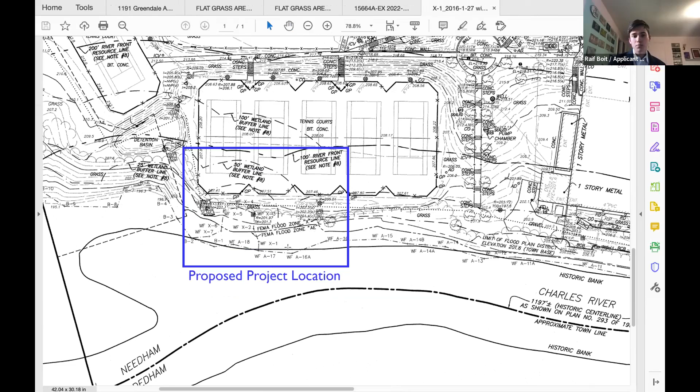The first is the installation of a canoe rack. This is not a dug-in fixture. Instead, it will simply lay on the grass in this area, as you can see on the mouse. The dimensions of the canoe rack are 10 feet long, 8 feet tall, and 8 feet wide. It is made of wood. There are no posts being dug for this canoe rack. Instead, an extremely minimal amount of leveling, displacing less than half a cubic foot of dirt, will occur before laying paving stones on that to keep the wood out of direct contact with the ground so it can last longer.

The second part of the project is in this area, the clearing of invasive species and debris to provide access to the river.

As you can see, this is a drawing of the existing conditions of this area. There has clearly been some sort of construction done in the past at this location, as evidenced by sheet wood that is there, as well as 2 embedded pillars seen here and here.

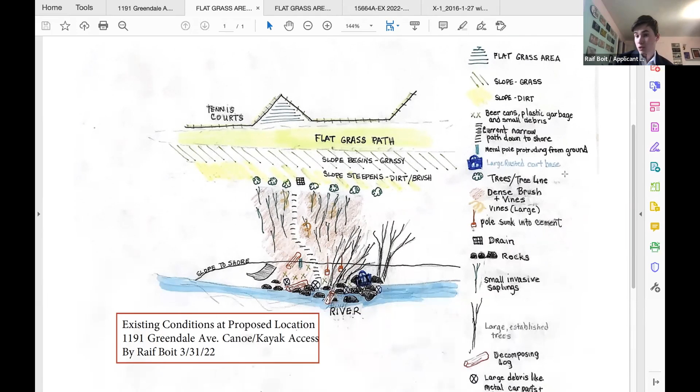One of those 2 pillars will be removed as it is already relatively loose. The second instead will be polished and repurposed to hold a sign. Then, as I said earlier, the canoe rack will go in this area, and there will be clearing of invasive species in this area.

Does everybody see this? Good. So this Asiatic bittersweet has been choking out plant life in the area. Among them, you can see this is actually hanging from that same vine.

So we plan to remove all of the vine in that area, as well as some Japanese knotweed in the area, which is bamboo. We will be trimming that back, which is mainly in here, as well as some brush. We will also be laying 2 paving stones here and here.

This is to level the area, as the current location where we plan to put those 2 paving stones is a tripping hazard and not level. So laying these paving stones will make the path that already exists much easier to traverse, as well as prevent further erosion.

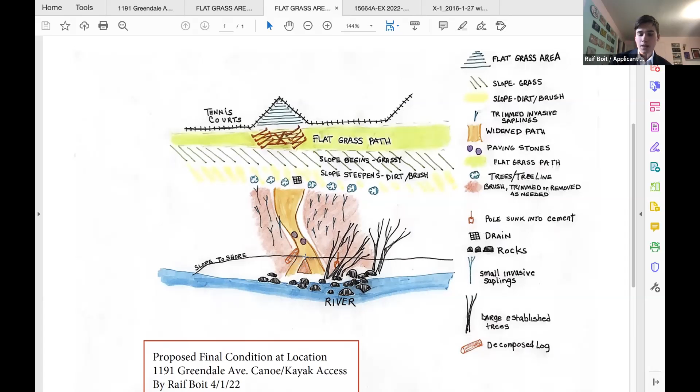Then there will also be some minor trimming of existing plant life in this area, simply to keep it out of the path and make it more easily accessible. As well, we'll be cleaning up dead wood and debris on the ground.

As well as large pieces of litter, such as this metal dolly that has been there for, at the very least, to my knowledge, months, most likely years. We'll be removing all of that, as well as all this debris you can see on the ground next to those pillars. We'll be removing most of that as it's already deadened, and we'll simply be clearing it out.

Beyond that, mainly we'll be taking out leaves and some beer cans that are already in that area. As you can see, there's one down here, as well as a couple of metal stakes that are existing, as you can see in this photo here, that was clearly put in for some previous project many years back, along with the metal pillars.

That is the gist of the project. I now stand open for any questions that members of the commission may have.

Nice. I will go to the commission members. Trying to decide what would be the best image to have on there. Maybe the first one that had the blue square?

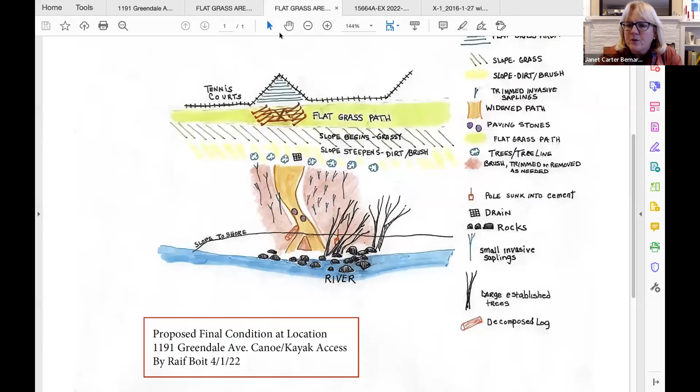Hey Janet, could I suggest, could I also ask, there was one that had all 6 pictures showing at the same time or something like that at one point? Would you rather be looking at that one, all 6 pictures? At some point, I don't know if it had every picture or just the photos. No, there was this- good. Now it doesn't have the one you were suggesting, though. It doesn't have that one. But anyway, that's okay, because I was just trying to decide what would be easiest for the commission to reference the various pieces.

Peter, do you have any comments or questions? Yeah, just a couple of questions. So it sounds like a couple of- why is it switch off?

Anyway, so it sounds like there's going to be no platform or anything like that built, just a couple of paving stones, clearing debris, a couple of paving stones to stabilize a little bit of the ground. That's what I heard. Is that true? Yes, the only thing that will be built is the canoe rack, in which the only digging will be for the paving stones.

Okay, and now, I figured I'd ask, is this open to the public at all, this access? It is primarily for the school, St. Sebastian's, to provide access for them. Okay.

And could you go back to a picture showing the ground going down to this area? Do you have a picture of the ground actually going down to this area? Just curious if there's anything at all you have for that. Do you have any picture?

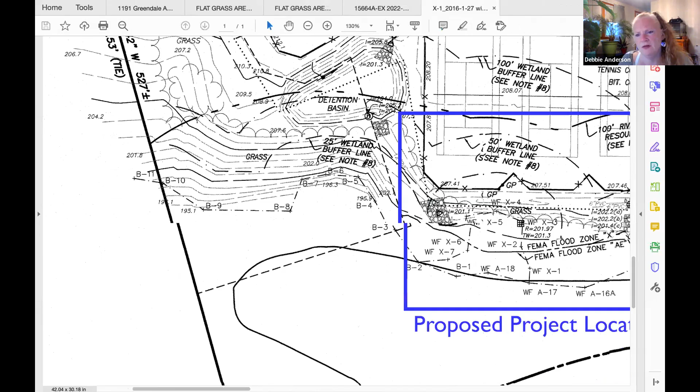But this is near the tennis courts, is that correct? Yes, there it is. If you want clarification, the poison ivy was down by the parking lot area. And they were supposed to put trees in that area, but they couldn't find a landscaper that would do that, so they repositioned the trees further down towards this area.

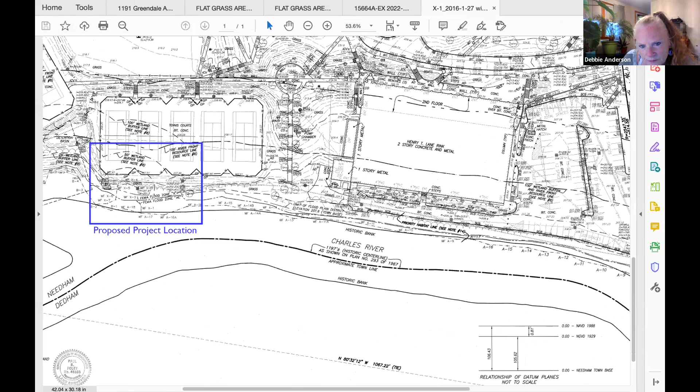So for reference on this plan, my project is happening over here, and the area where the poison ivy was is over here, from what is being described. Peter, anything else? No, I'm good, thanks.

Allison? Just a couple of things—good presentation. I think this is going to be a great project, and it's nice you'll be able to use the river. So a couple of things: one is that you're going to seed, and I think the seed you install should be a native seed mix that can take some shade.

So you can get seed from a company called New England Wetland Plants. I don't work for them, but I use them all the time, and they have specified special seed mixes. Don't just go to Home Depot and get bluegrass or perennial rye.

And another thing is, if you're going to do this yourselves—are you guys doing it yourself? The construction? Yes. So just try to limit it to just what you need and not more than that.

And the third thing is, I saw beer cans, and I think probably those are from people from St. Sebastian. So just be aware that you're going to make a more attractive place to sit and drink beer, so try to keep it clean. That's all—beautiful project, it'll be great.

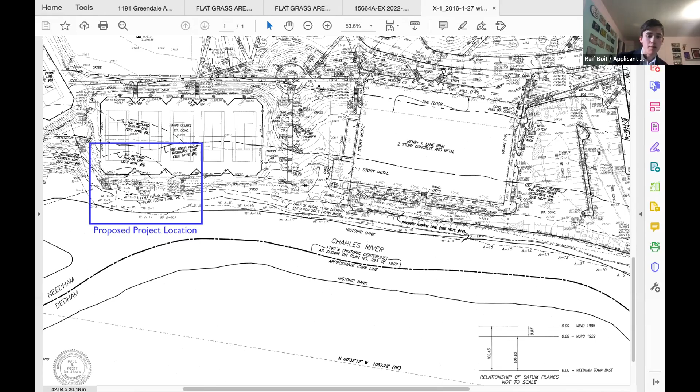And how about the Japanese knotweed? What's your hope to try to combat that? We'll be cutting it back in the area of the project due to the massive scale of the knotweed throughout this riverbank. We're not going to be removing it entirely, but instead just removing it within 5 or so feet of the project area, as removing it entirely would be a much more massive undertaking.

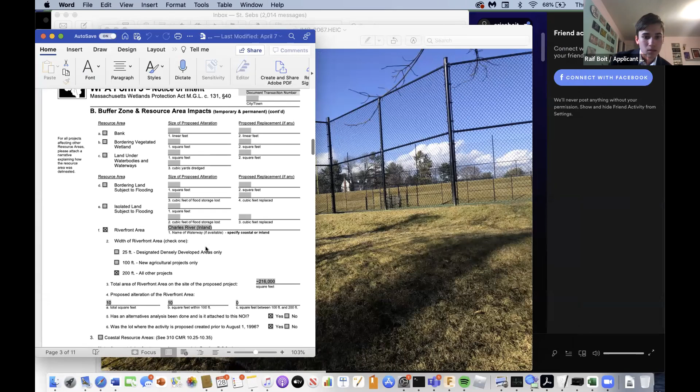Do you have a square footage of the area that you're working within? I believe it's about, estimated, just off the top of my head, I would say 40. I have a figure somewhere, give me one second, let me pull it up. It's mentioned in the WPA. It's about 15 to 20 square feet in total. Okay, 15 to 20 square feet.

And that will be written, I assume that we will issue an order of conditions and that will be written. So you're going to want to stay within that 15 to 20 square feet, to kind of limit your exposure. We also want to make sure that you don't dig stuff up so that the soil gets eroded, but the invasive species are tricky because they'll just grow right back.

Outside of removing those invasive species, the only digging we are really going to be doing is to place these two paving stones here, with extremely minimal digging happening for the canoe rack. The goal of the paving stones is to prevent erosion as well as provide a little bit of footing for people.

Currently, this area is hard to get a grip on, especially if you are coming down carrying, say, a canoe. So the paving stones are simply to provide a flat and level footing, as well as to prevent any future erosion.

I was a little confused about your canoe raft, because the dimensions, it's 8 feet tall. Dimensions, I'm sorry? Rack, not raft. Oh, it's a rack, that was why I was confused. So what is a canoe raft? No, I would be confused too. This is a preliminary design. It has since had some minor modifications, including the addition of a few cross braces. However, this should give you a general sense of what will be built.

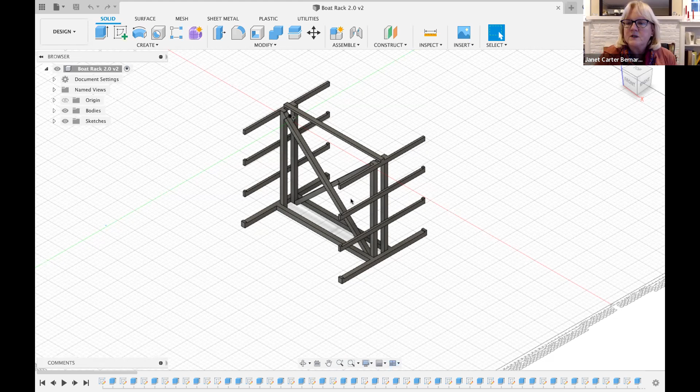Okay, so basically, once we finish with tonight's hearing, we will continue this to the next hearing. Assuming that we issue you an order of conditions at the next hearing, then there's a 10-day appeal period that you'll have to wait before you can start. Just to give you a heads up on the timing of all of that. Of course, so just to keep you aware. Okay, so do any commission members have anything else they'd like to add before we open it up?

Yes, Janet, I just have a couple of things. One is, I'm curious, what will the sign say? You're saying that one of the posts is going to be left there for a sign. What was that sign going to say?

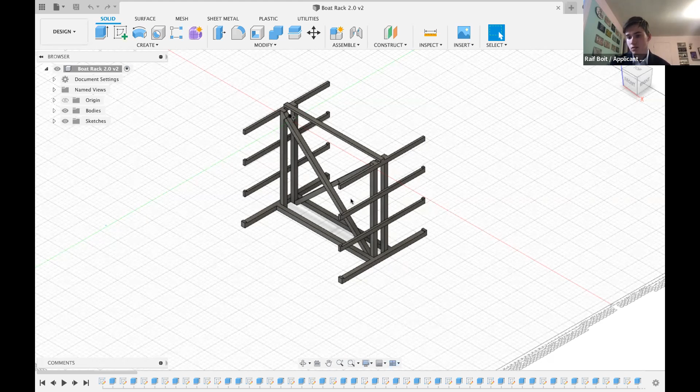Most likely something along the lines of Saint Sebastian's canoe area, or something along those lines. I will be finalizing it with Saint Sebastian's headmaster sometime within the next few weeks. I assume St. Sebastian's is on board with this project. Yes, of course.

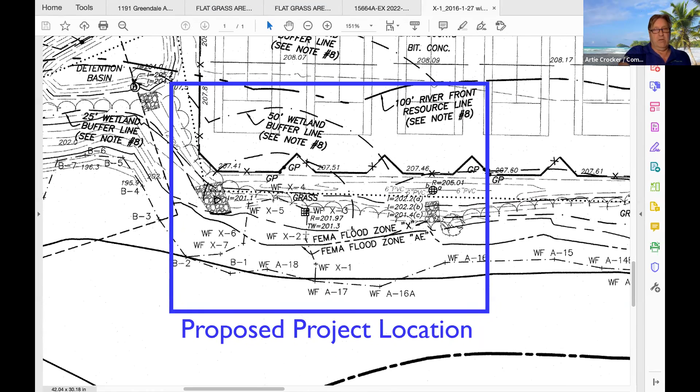Raif, can you pull up that diagram that shows the aerial view and the rectangle around the area, or a zoomed in one that shows the one to the left there. Yeah, that one. Actually, I was just curious about one thing - maybe I'm just trying to understand the 50-foot buffer line and the 100-foot line.

So, who flagged the wetlands for you, in this survey overall? Where it has WFX-5 and WFX-3, those are wetland flags.

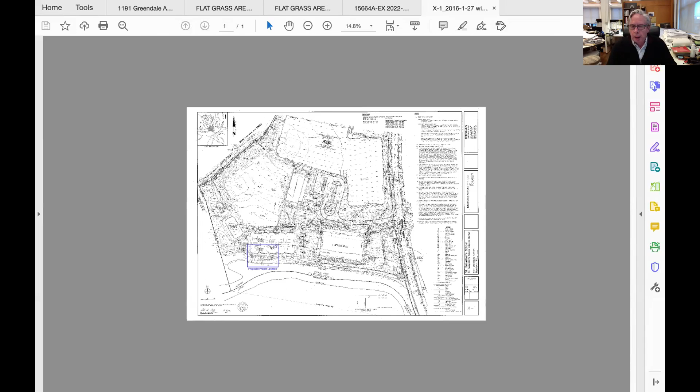This is a plan from the St. Sebastian's project, the athletic area. It's done by John Rockwood at Ecotech. And what year is this dated? 2016.

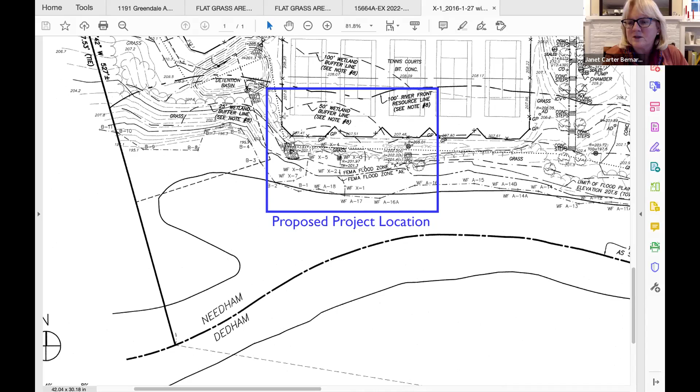And Deb, have you been out to the site? Oh wait, that was a Clay project, I'm sorry. Clay, have you been out to the site? Yes, I have. And are you comfortable with the wetland flags as they're shown on this plan? I am, and that was a discussion that Raif, Rob, and I had on site as well with that document. While the delineation is a bit older, the areas that we walked for the launch still appeared accurate.

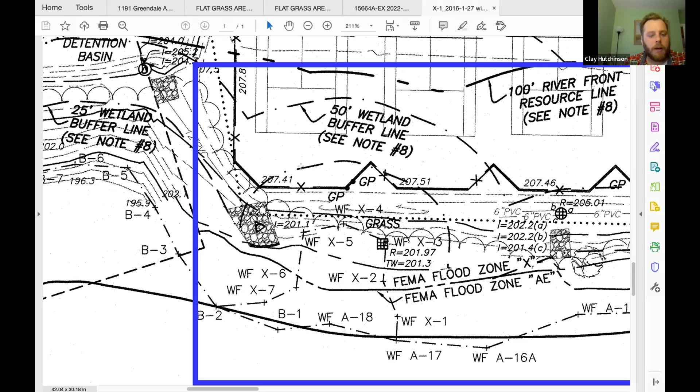And is there a catch basin in the middle of all this? There is, it's kind of an interesting spot. Technically, the catch basin is up near the top of slope, and it's not quite within the wetland. I think the flag was placed there due to the amount of knotweed that climbs the slope there. So I believe there's a portion of wetland that continues to elevate, it doesn't just stop at the bottom of the slope. But the work will be outside of the wetland boundary.

When we walked that area, one of the recommendations I had for special conditioning is to have staff on site for their day of work, at least the first day, for a couple of purposes. One is to make sure there's a clearly defined area that they're limiting their work to, so we don't have any work or clearing encroachments. I'd like to be out there to help.

Apprise all of the scouts working on the project how to identify these invasive species, both so that when they're working on site they can identify them, as well as broadening their knowledge of invasive species and keeping an eye in their own homes and other places. And make sure overall the project remains minor in the work itself - using extreme discretion as to the extent of clearing, making sure we're only doing mechanical clearing, and making sure disposal of the invasives that are cut is handled accordingly. That was one of the things we discussed with the Japanese knotweed - bagging it immediately and not allowing any seeds to disperse or piles to decay and spread.

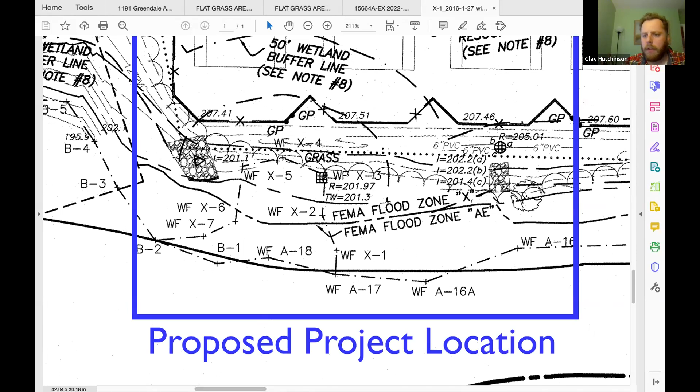So, any more commission members, anything to add? Is there anyone in the audience that has anything more to add about this? There is one hand raised, and I will pull them over to talk. It looks like it's listed as a Ken Goldberg. Ken, just a moment. Ken Goldberg, if you can hear us, you have the floor.

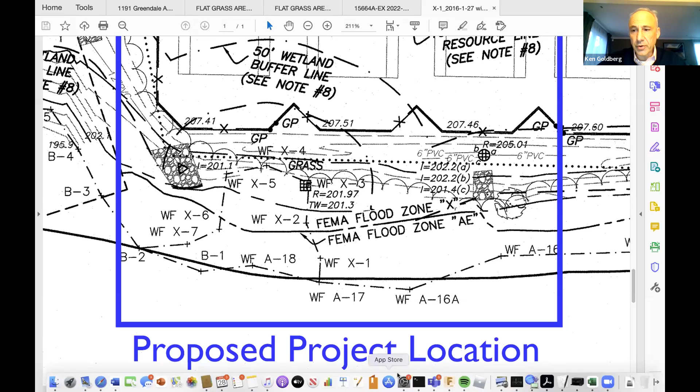I don't think the owner is here tonight. I'm not sure if anyone is here from St. Sebbe's. I can discuss it with Mr. Burke, St. Sebastian's headmaster. That would be great. And you can come back and tell us how that conversation went in two weeks when you return.

Anything else, Mr. Goldberg? That's it. Thank you for hearing me. Appreciate it. Anybody else in the audience?

Clay? There are no other raised hands. Is there anything more that you want to add on this?

Just that I felt the project was minor. It wasn't officially a minor activity listed as exempt under the regulations. This is certainly a project that we would have probably considered as an RDA. However, DEP's guidance no longer allows that stance, since RDAs are not appropriate within Riverfront as it is a resource area. So we worked with Rafe to go through the notice of intent project process.

When we were walking the site, the locations for those two embedded landscape pavers, I think, are going to be important for not just mitigating a tripping hazard, but also mitigating any erosion down what is already an existing footpath. As you saw in the photos, there's a bit of overgrowth of vegetation, but for the most part there's a strong prevalence of invasive species.

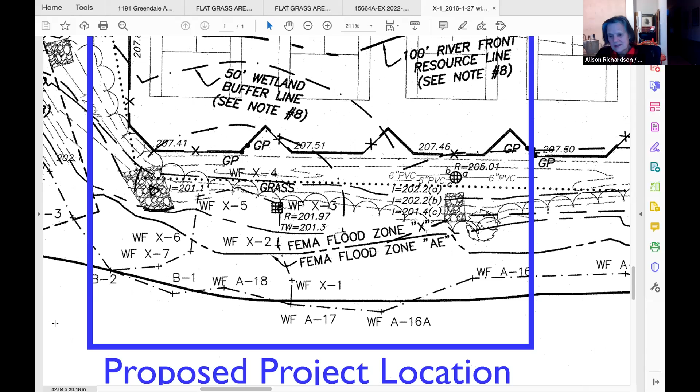Is there anything else you might want to know about this? Thank you. Okay.

And we can try to have our order organized for the next hearing so that the shorter your appeal period, the shorter the whole extension is, to get you going, because this is a great project.

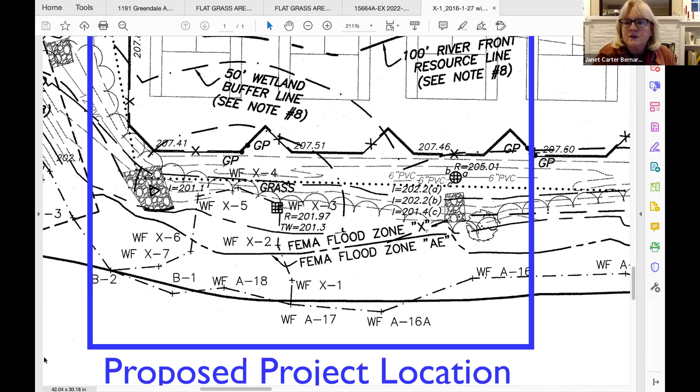1, 2, 3, 4, 5, yes. Okay, just wanted to make sure, just in case I'm not at the next meeting, if you know what I'm saying. You're a quorum plus one, okay. That's kind of a good point, but yeah, we'll make it happen.

May 12th. Yeah, I'm not going to be at the next hearing either. So I don't know if anyone moved. So moved. Do I have a second? Second. Okay, all in favor to continue this

project at 1191 Greendale Avenue, notice of intent, to May 12th. Allison? I think you said aye. Stephen? Aye. Artie? Aye, Peter? Aye. Great, thank you very much for your presentation.

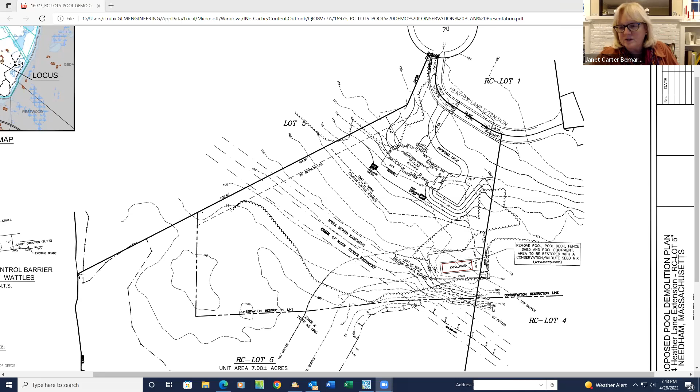And Clay, I sent you a couple of pictures, I don't know if it's easy for you to pull up, just to see what the pool looks like, as well as there's a fence that seems to be kind of, I guess, at the top of the slope, but maybe at the 50-foot buffer. And it's covered by vines that Rob and I, being engineers and not wetland scientists, did not know what they were, but they looked invasive. We both thought that they were invasive.

So the pool will come out. The fence is basically the limit of work, and that will come out as well. But there is a vine that's all kind of tangled in the fence.

What is this? Somebody tell us what it is. I know what it is - it's euonymus, big leaf euonymus. It's planted. Is that non-invasive? I don't know, maybe not. It's gonna all get ripped out anyway, so it doesn't matter. It's not native, it's Asian, but it's not like the other things that Rafe was talking about. Yeah, it's not a weed.

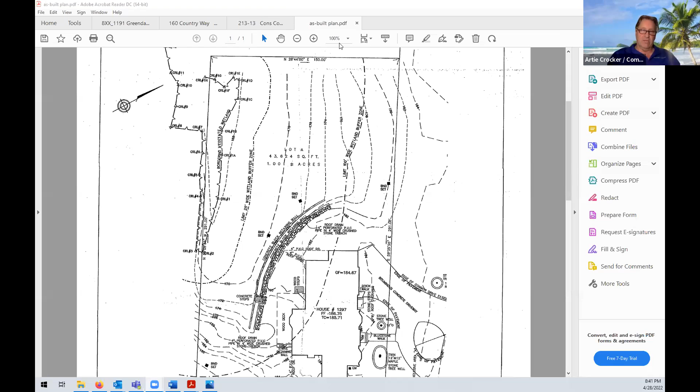Were they loading up dirt on trucks, or just spreading around whatever was down there? Were they actually loading stuff onto trucks and taking it away? I don't know, I cannot say.

Artie, if I may speak to that, if you look at the plans here, you see the 174 grade, that's around the tree line, and that's about the highest the land goes. The 172 and 170 grades are about where the land sits right now. It's not that steep of a pitch. It's almost as if the grade hasn't changed much in those areas. Maybe a half foot at the absolute most got graded down in the 172 range, but I'd say the 174 grade is still about natural conditions, because that's a natural tree line in that section. And again, no woody plants were actually disturbed in the making of this disturbance to the field.

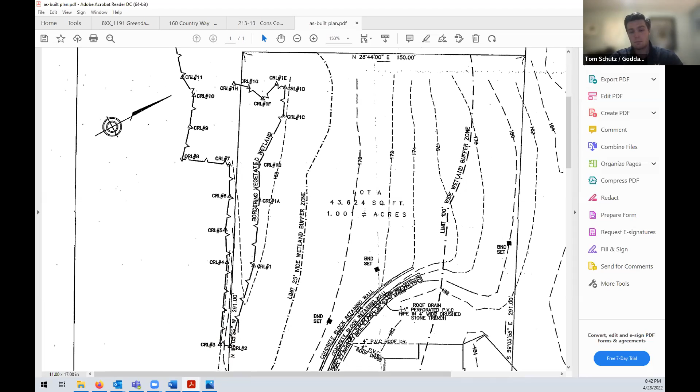I have a question. I heard from Gideon that some gravel was put down. You're not permitted to put any fill in wetland areas. Even if you have notified, you're not allowed to change or fill in the wetland areas. So you're saying that they actually filled in some areas?

If I may speak to that, the retaining wall was repaired with a bit of gravel, a large almost 1.5-inch stone that might have been accidentally spilled on the ground and pushed toward Gideon's property. You can kind of see a little bit of the stone lining the edge of the retaining wall. That either didn't get used or was misplaced during construction. Nothing has been filled on purpose and no gravel has been added to the wetland on purpose, that was all for building the retaining wall.

You can see the gravel, actually on top of the wall. Can I comment? Yes, you may, Gideon. So there's definitely gravel on the other side of the retaining wall, but that's an incorrect statement that there's no gravel on the other side.

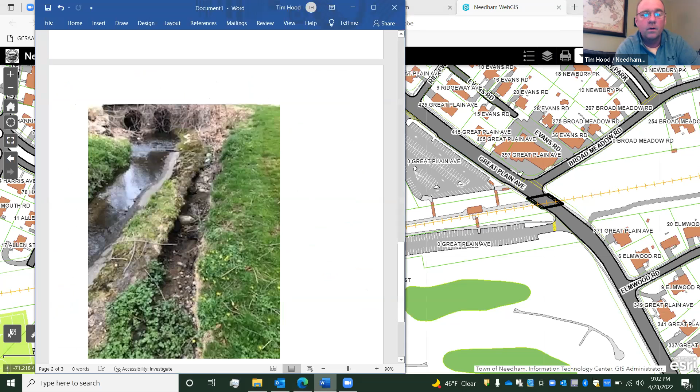See the pictures? Let me see. Yeah. What hole is this on? This is on the 8th hole. So this is the water coming off of the Harris Ave area, and this is the asphalt liner right there. At this area right here is where we're losing material from just the rainstorms.

It's becoming a little bit of a hazard. There's another spot further down, before we get to a walkway bridge, where it's happening. What's happening is there's some buildup in the area, and I think it's diverting water more to the side, causing it to wash out this area here.

Do you have the straight-on picture that shows under the bank? If not, I sent them to Clay as well. Yeah, maybe Clay might have that one. Yep, I'm just gonna take over this screen. Yeah, good, because I don't know. I'm done.

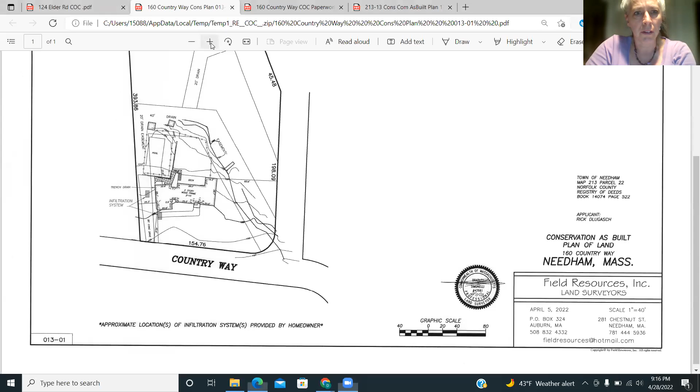So let me just enlarge this a little bit for you all so it's easier viewing.

The notice of intent that was filed years ago for this particular home was for the garage. What we find today is the garage is in the right place. The only change or additional work is this walkway in the back here.

This is a brick walkway that was also added, which brings, and actually it was the deck as well. The deck was in this notice of intent as well. So again, the deck and the garage were built as proposed. It was the walkway that we find different than the notice of intent.

Again, the order of conditions, forgive me, I forgot exactly when it was issued, but it has expired. 2017. Thank you.

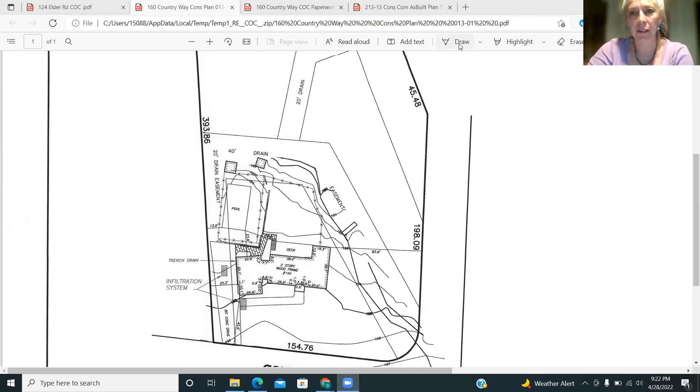Sorry, I'm trying to find that plan. So my one question is, that document you just had up said Herd Brook, but you said Fuller Brook. So what's - oh, it is Herd Brook. I do apologize, it's Herd Brook.

Yeah, okay, just to say that out loud. Great. Okay, so anybody, Deb or Clay, have any comment about this? I think, as Diane said, most of this was in our favor and relatively minor. So I don't know, the shed was 6 inches closer.

Okay, so any commission members have any comments? Allison, no comment. Peter, no comment. Artie, no comment. Stephen, no comment.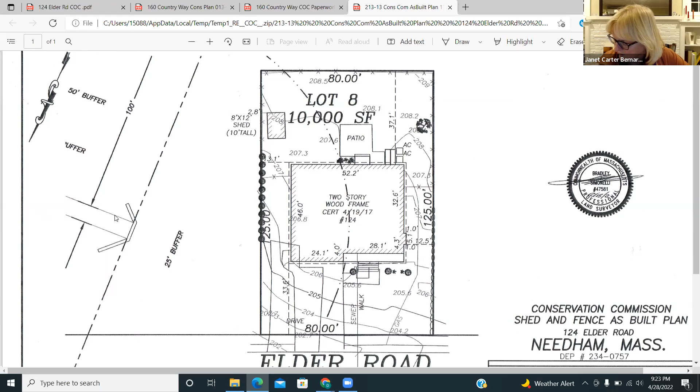Okay, if we're ready to issue the certificate of compliance for 124 Elder Road, DEP file number 234-0757, I'll take a motion. So moved. Second. All in favor? Allison, aye. Stephen, aye. Artie, aye. Peter, aye. Thank you very much.